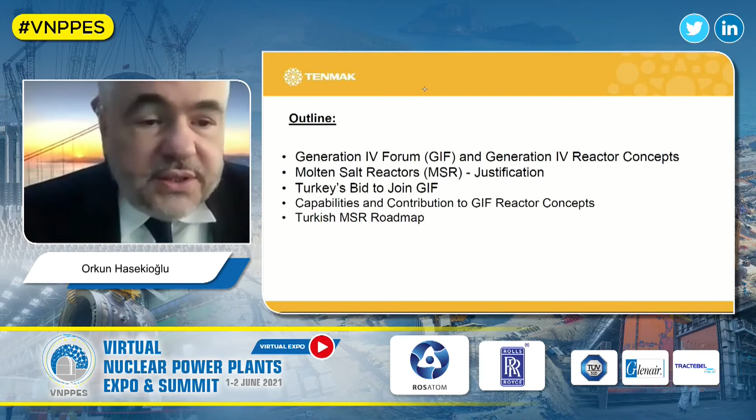Here's the outline of my presentation. I will start by introducing the Generation 4 Forum, the general concepts on Generation 4 reactors, in particular molten salt reactors, and the justification as to why we have picked molten salt reactors as our national project. Then I'll continue with Turkey's bid to join the Generation 4 Forum, our current status in that regard. I will continue with our capabilities and potential contributions to Generation 4 reactor concepts, and finally the Turkish molten salt reactor roadmap.

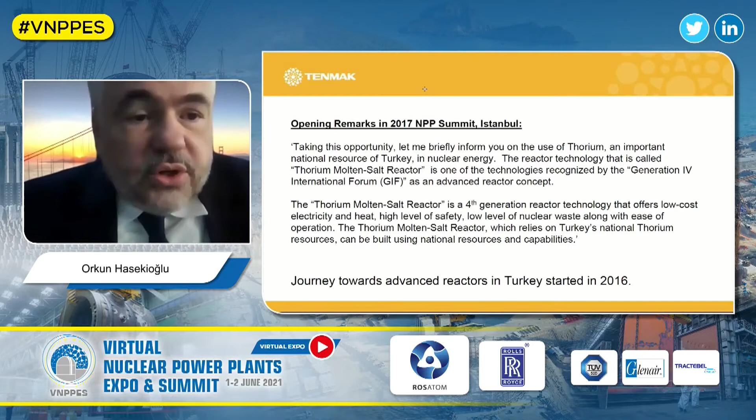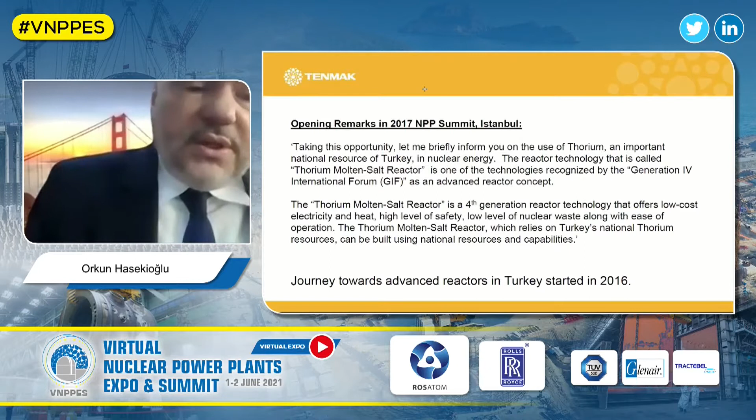Our journey towards advanced reactors in Turkey goes back to 2016. I just recalled my opening remarks in the 2017 NPP summit in Istanbul. In that introductory speech, I was serving as vice president at TÜBİTAK at the time, we had mentioned that the thorium molten salt reactor is a fourth generation reactor technology that offers low cost electricity and heat, high level of safety, low level of nuclear waste, along with ease of operation. The thorium molten salt reactor, which relies on Turkey's national thorium resources, can be built using national resources and capabilities.

Briefly, Generation 4 advanced reactors, we expect that it will revolutionize energy production. All the other reactor concepts, starting from Generation 1, Generation 2, 3, and 3 plus, are referred to as evolutionary designs. Conceptually and technologically, they are all similar. Generation 4 reactors, on the other hand, are referred to as revolutionary designs. The conceptual approach to nuclear energy production is entirely different in these approaches. It's expected that by the year 2030, Generation 4 nuclear energy reactors will be in widespread use worldwide.

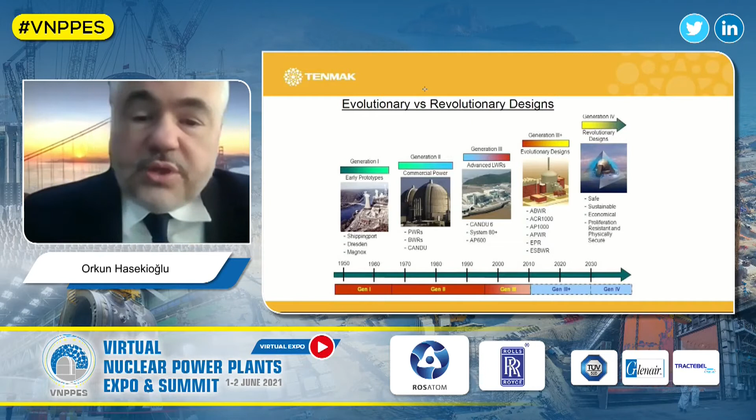The main motivation behind developing or designing Generation 4 reactors is more safety, sustainable energy production, economy, low cost of energy production, and proliferation resistance as compared to the previous Generation 3 and Generation 3 plus reactors. As I mentioned, the major objectives behind introducing these reactor concepts worldwide is sustainable, low cost, safe, and proliferation resistant nuclear energy production.

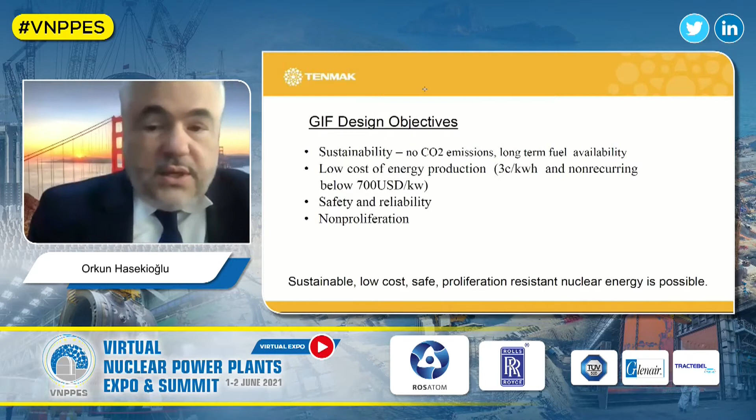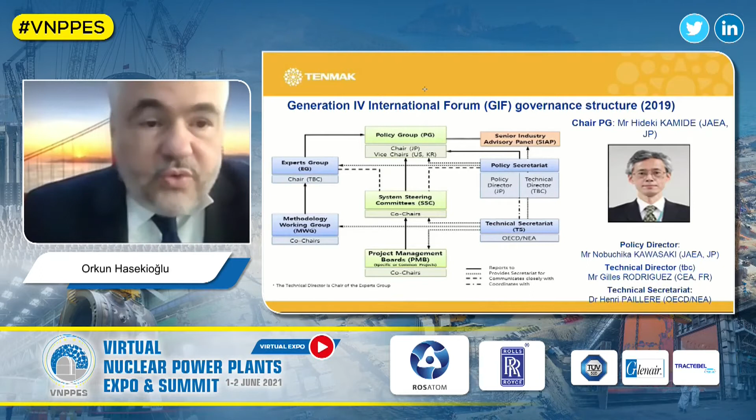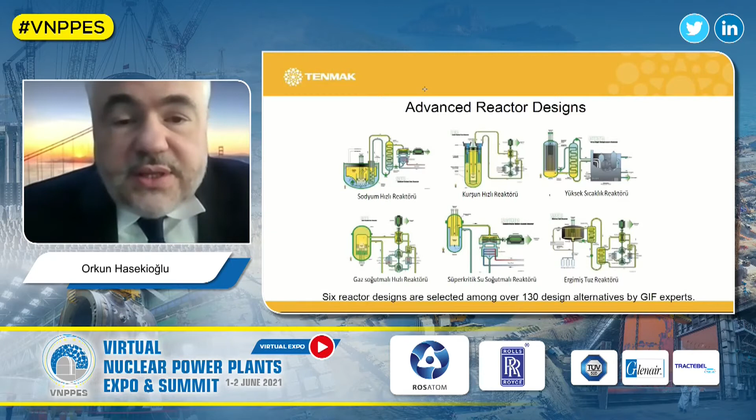The current GIF membership, as I said, it's a technology partnership program participated by all the nuclear energy capable countries, including United States, Canada, China, Japan, Russia, and most of the European countries covered under the Euratom program. The Generation 4 Forum was established back in the year 2000, and put together a group of expert nuclear reactor design experts. Out of over 130 design alternatives, this group of experts selected 6 reactor designs that we refer to as the advanced reactor designs.

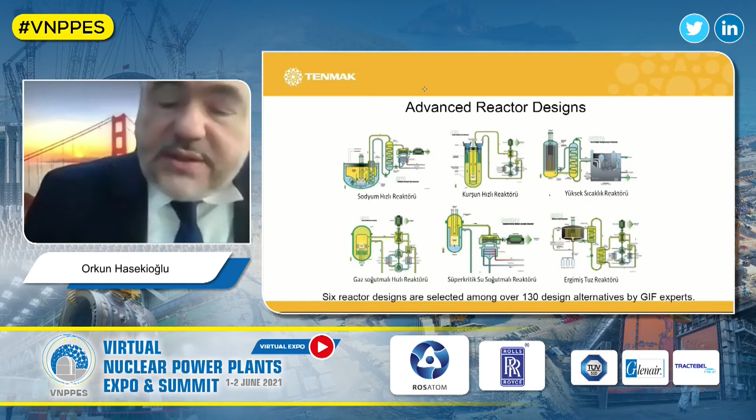Under this forum, as we mentioned, there are many countries participating, with subgroups of research collaboration pertaining to all of the 6 major nuclear reactor design concepts. One of them is MSR, molten salt reactors, and there are 5 other reactor designs. Various signatory countries of this forum collaborate on these advanced reactor design technologies.

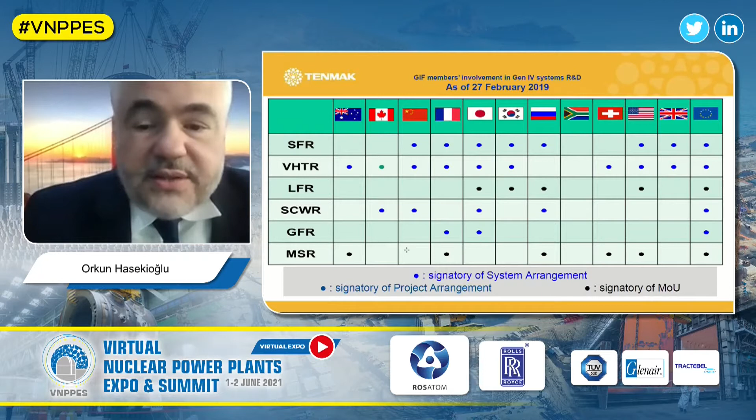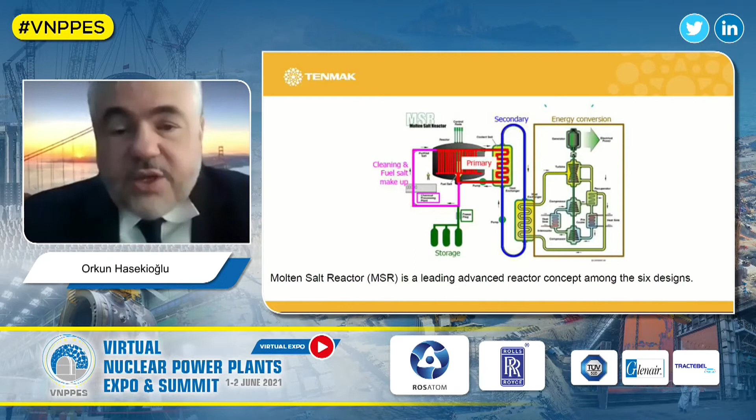As I mentioned, the molten salt reactor is one of the leading advanced reactor concepts among these six designs. In this particular design, the fuel as well as the coolant is in the form of molten salt of thorium, uranium, and lithium, and in certain cases beryllium fluoride or chloride salts. The heat energy produced as a result of the fission of the fissile material in the salt is transferred through a heat exchanger through a secondary energy conversion to electricity. And in many instances, it may be desirable to actually utilize the heat directly.

One might ask why we have selected molten salt reactors among the six advanced reactor designs nationally, and what's the motivation behind this.

The history of the molten salt reactors actually goes back to the 1950s at the Oak Ridge National Lab. At the time, in the 1940s and 50s, it was named the Clinton Laboratories, and the Clinton Laboratories was mandated to construct the world's first operational nuclear reactor. Its second objective was to develop chemical processing facilities to separate plutonium from the irradiated fuel.

The concept of molten salt reactors started as a reactor for the propulsion of a jet engine, and it was referred to at the time, in 1958, as the Aircraft Reactor Experiment. But then it was pretty soon recognized that it's not convenient to use nuclear reactors on a plane because of the neutron radiation isolation issues.

But the research continued under the name Molten Salt Reactor Experiment. During the time between 1964 and 1969, a 7.4 megawatt thermal reactor operated at the Oak Ridge National Lab. So the takeaway lesson from this is that MSR is actually conceptually, at least not commercially, but conceptually a proven technology.

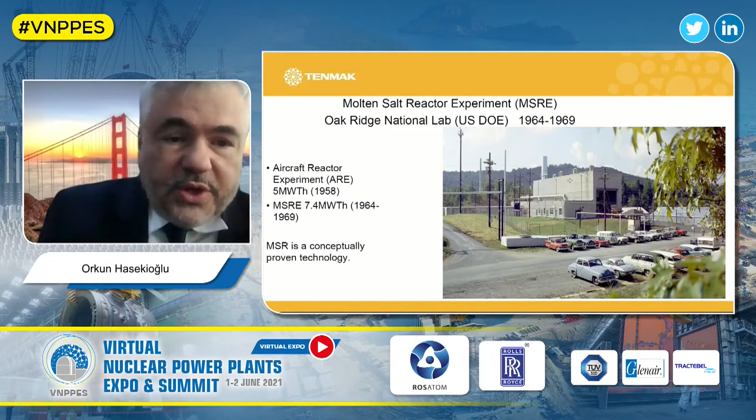We actually had a visit to the Oak Ridge National Lab back in 2017 and got to know some of the participants of the Aircraft Reactor Experiment and the MSRE experiment, many of whom have of course passed away since.

These experiments were stopped by the administration at the time, and the current light water reactor technology was preferred. Oak Ridge National Lab at the time continued working on the light water reactor technology as well as other parts of the world. But the director of the lab at the time, Alvin Weinberg, and the famous physicist Eugene Wigner, were the masterminds of this project at the time.

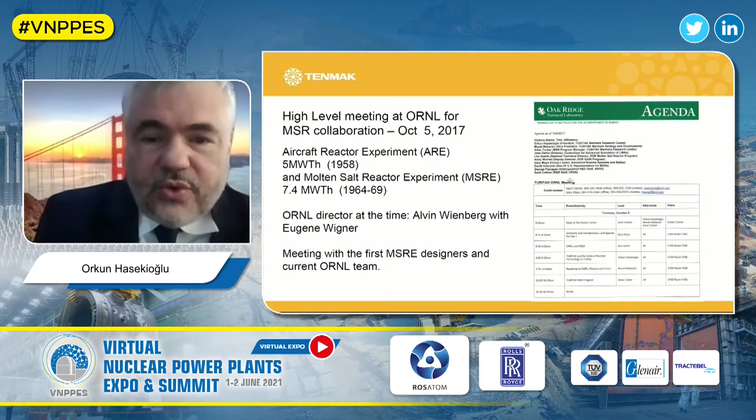The reason for our visit was to offer a joint collaborative work on the Generation 4 reactors together with Oak Ridge National Lab. But the suggestion we got at this meeting was to join GIF, the Generation 4 Forum, and pursue our joint efforts through this forum.

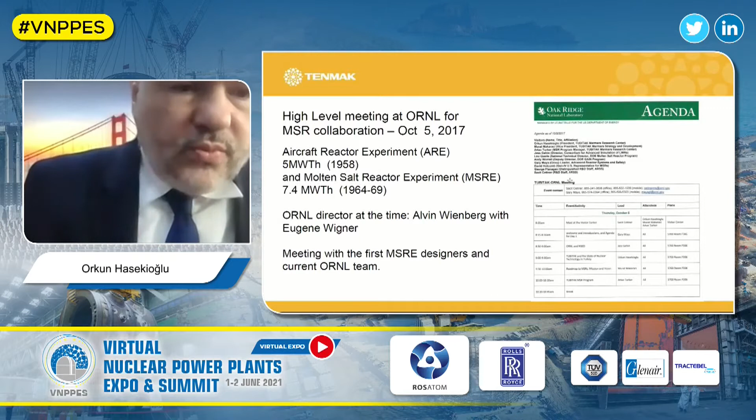As a result of all this, the early history and the expertise developed through the Generation 4 Forum, and currently especially the introduction of this technology through commercial companies like TerraPower and many others, this early success ignited a very strong commercial interest recently during the past few years.

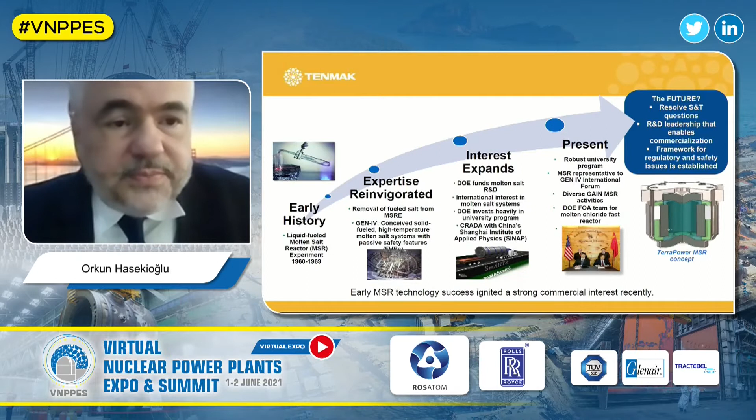It produces less spent fuel. Use of light water reactor waste as fuel is possible. It has a high energy density, enabling production of a wide range of nuclear reactors, from megawatts, hundreds of megawatts, to a gigawatt range.

As you know, one of the main reasons why the Fukushima and Chernobyl disasters happened was the core melting problem. Core melting is not possible in this case because the fuel is already in molten form.

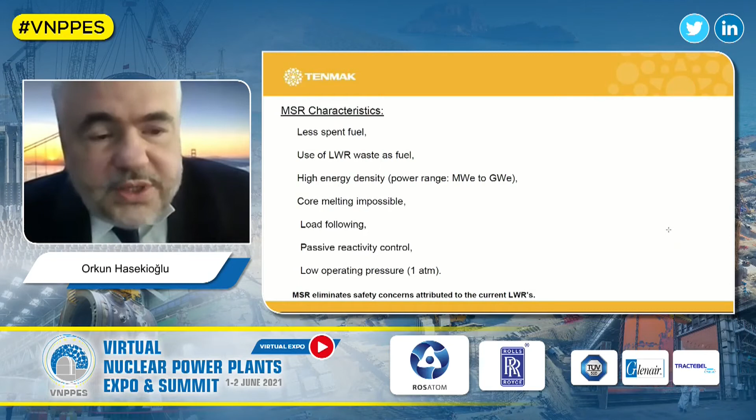There's the load following property: the energy produced follows the demand in the grid. That's important because it eliminates the need to store the produced energy.

In addition, the passive reactivity control inherent to the design of the reactor, and low operating pressure, one atmosphere actually, compared to the few hundred bars in conventional reactors, makes this kind of design much safer compared to current reactors.

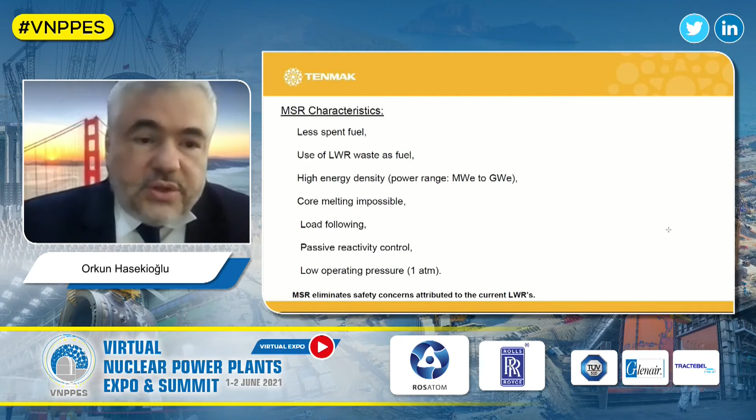In addition, one of the other motivations that made us pursue molten salt reactors was that generation 4 commercialization efforts are gaining momentum worldwide. The GIF annual progress reports, in many cases, identify molten salt reactors as one of the mature designs among the 5 or 6 total designs. Additionally, internationally, many research institutes, including BARC in India, and the Chinese Academy of Sciences' SINAP, have adopted this technology, or variants of it, within their national strategies.

China is now investing in commercial construction of an MSR reactor in the gigawatt range. Additionally, over a dozen private companies worldwide, in the US, Canada, and Europe, have adopted variants of molten salt reactor technology, MSR-like technologies I would like to call them, including TerraPower. All these indicate the commercialization potential - not only at the research level, but commercially, that MSR is a viable technology.

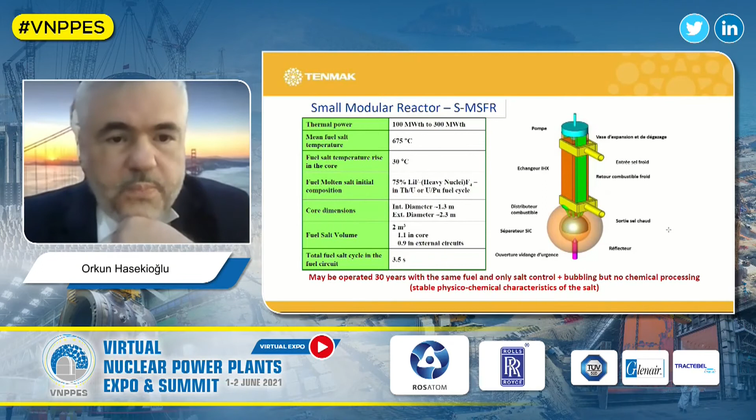So, a few words about our bid to join the Generation 4 Forum. As I said, the story of our journey to joining the Generation 4 Forum goes back to 2016. The National Council of Science and Technology, in its meeting in 2016, headed by the Prime Minister at the time, issued a decree to plan for advanced nuclear energy technologies.

Then at TÜBİTAK, where I was serving as vice president at the time, the Science Council - in other words, the governing board of TÜBİTAK - made a decision in its meeting in November 2017 to participate in the GIF platform.

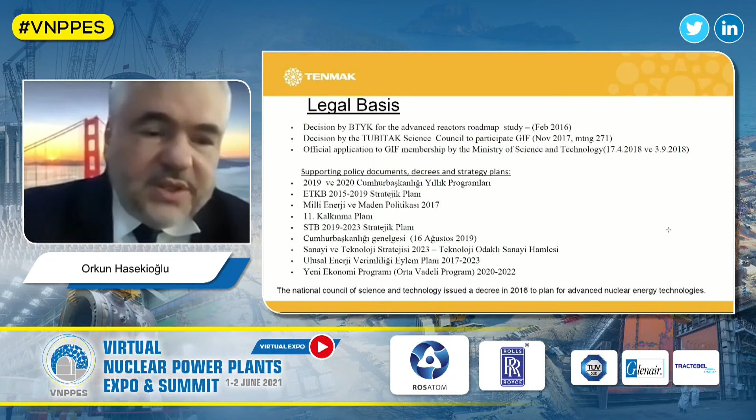As a consequence of this, our official application for GIF membership by the Ministry of Science and Technology was submitted to the policy group governing board of the GIF platform. There are many other supporting policy documents, decrees, and strategy plans regarding this. I'm not going to go over all of them, but there is mention of participating in these technologies.

Then, as a consequence of this, our case was presented to the GIF policy group in a meeting in Paris in 2018. In this meeting, we presented to the policy group how Turkey can contribute, and the relevant capabilities of Turkey, in case Turkey joins the GIF platform.

As a result, the policy group issued a report back in August 2019 saying that, as GIF experts, they observed that Turkey has the capability and potential to provide mutual benefit and added value for GIF organizations, members, and participants. They then accepted our application on one condition: that there has to be a multi-year research plan adopted by the government of Turkey.

Briefly, I would like to talk about some of the ways that Turkey's infrastructure will contribute and is contributing to MSR research. As we have demonstrated internationally to the GIF policy group, our infrastructure embodies many of the capabilities essential to design, build, and operate an MSR reactor. I will indicate some of these capabilities.

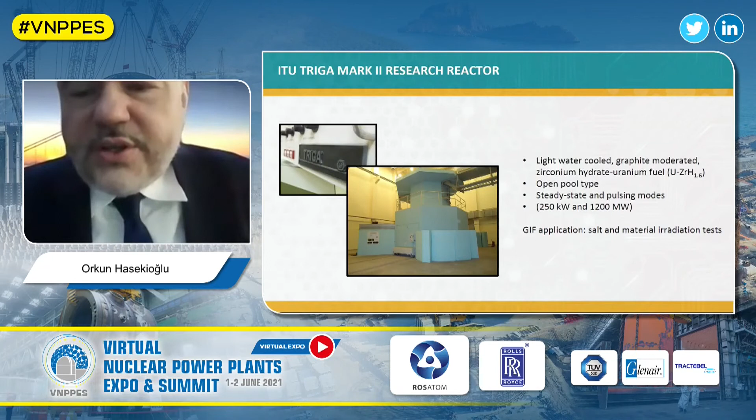Similarly, there's another research reactor at Istanbul Technical University, the Triga Mark II. It can also be used for salt and material irradiation tests.

At the Marmara Research Center of TÜBİTAK, we have a facility built for different purposes. It's a dual-use technology producing silicon carbide composite parts for the aviation industry. In many applications, this silicon carbide material is suitable for manufacturing reactor parts, so this facility is suitable in that respect.

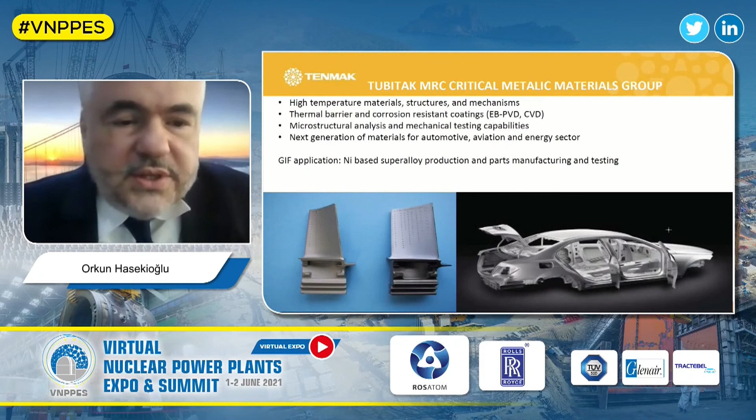Additionally, at TÜBİTAK Marmara Research Center, the critical metallic materials laboratory produces nickel-based superalloys and manufactures components used in gas turbine jet engines. This material technology, Hastelloy and other nickel-based alloys, is crucial in the development of different reactor components and parts. We have all the stages from CAD design to casting, coating, heat treatment, and characterization available to produce such parts using superalloys.

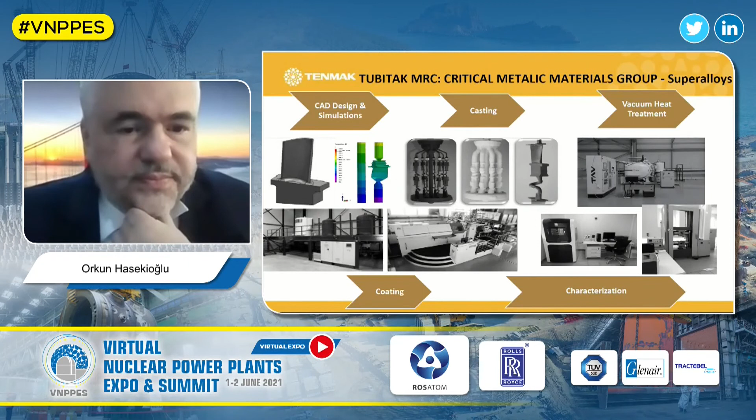Our isotope enrichment program is not focused on this particular project for boron isotope enrichment, but the same ion diffusion exchange facility can be used to separate lithium-6 and lithium-7, for instance.

Again, at TÜBİTAK Marmara Research Center, we have facilities where we handle molten salt compounds of sodium, calcium, and lithium chloride flow loops. The experience in producing and handling molten salts is crucial, again, for this technology.

Similarly, the Energy Institute of the Marmara Research Center of TÜBİTAK, the balance of plant, the secondary cycle where we generate electricity from the produced heat, is an important contribution. A site assessment study at the Sinop nuclear power plant site was done, again, by TÜBİTAK Marmara Research Center. We also have an institute on rare earth elements and thorium.

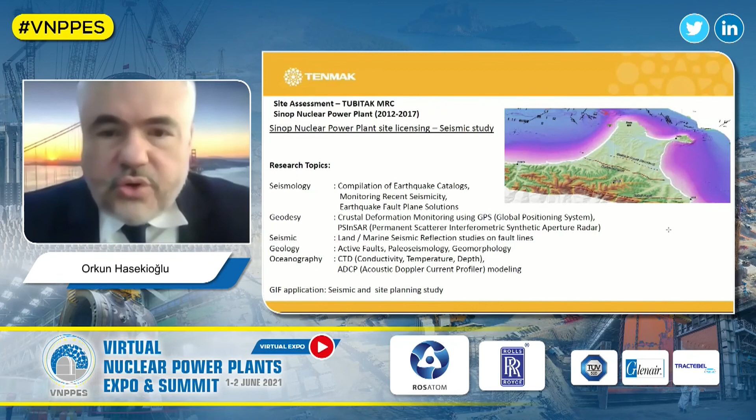Thorium is one of the key materials. Thorium itself is not a fissile material, but it's a fertile material that could be converted internally to a fissile fuel. So this institute is dealing with that technology.

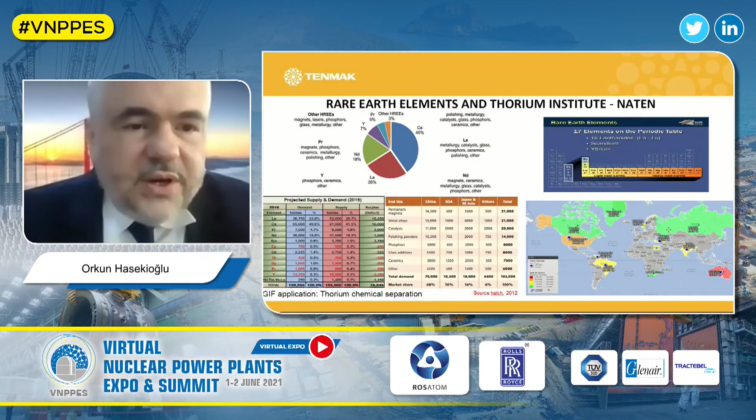Our membership with CERN is relevant in the design and testing of sensors, readout circuits and ICs operating at extreme high radiation conditions. Our joint work with CERN is relevant in this regard.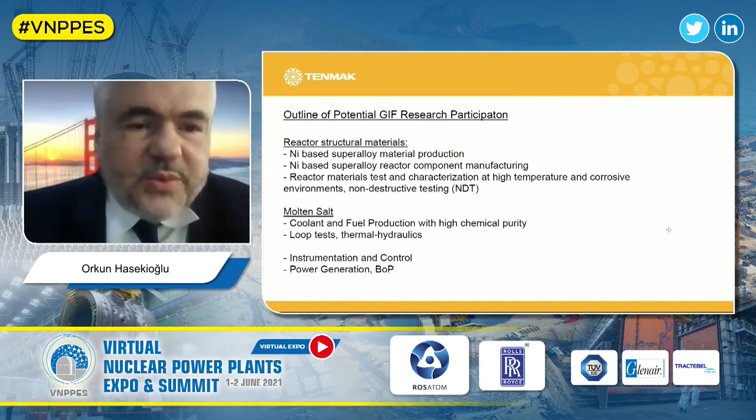Currently, this is where we are. Our national roadmap for advanced reactors, which we have been studying during the past few months in the National Molten Salt Reactor Roadmap Study Group within the Turkish Presidency Science, Technology and Innovation Policies Board, has been completed. It's quite a lengthy report, and it outlines a roadmap for advanced reactors, a 10-year plan for building an advanced molten salt reactor.

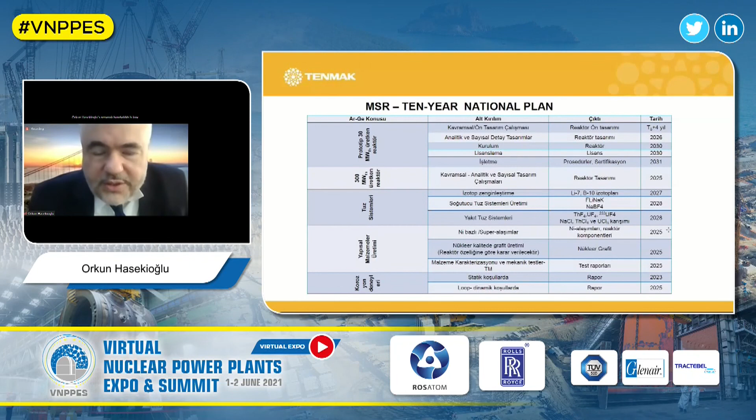Once it is approved and declared as our national plan, we will continue our national work internally, but also our application process to the GIF platform through this plan. It is a 10-year plan that includes two reactor concepts: one a 30 megawatt thermal small reactor, and another a 300 megawatt thermal energy nuclear reactor. And this is my email.